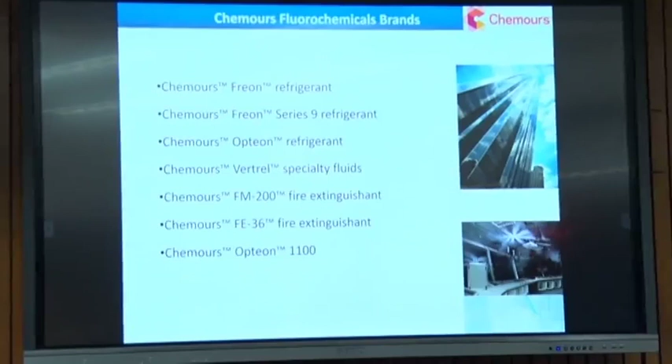What are the HFOs, the next generation refrigerants, the Opteon refrigerants? Then we also have fire extinguishing gases, which are also a part of the HFC and the HFO category, which help suppress fire. Then we have the Opteon 1100 refrigerant as well.

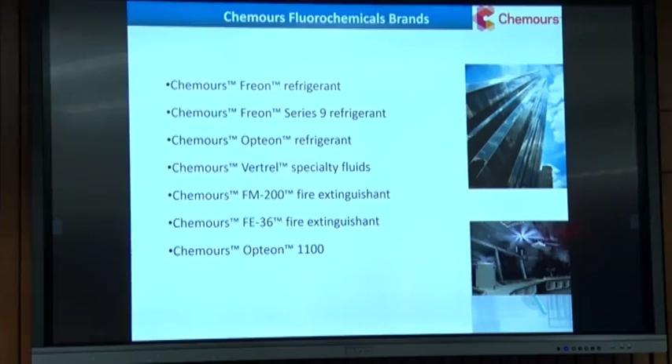So basically how it all started is CFCs. CFCs were the earlier molecules. HCFCs came in after CFCs, which had chlorine inside, which basically depleted the ozone layer. So in a refrigerant, the kind of properties we used to look for is that it has to be working around the ozone depletion, for which there is a parameter called the ODP.

Now most of the countries have signed the Montreal Protocol, as per which the ozone depleting potential has to be zero. We are already phasing out HCFCs, and we have already phased out a lot of them. Then the second property which we look for in a refrigerant is the global warming potential, the GWP. The next parameter is the total equivalent warming impact. And the third parameter is the life cycle climate performance of a refrigerant.

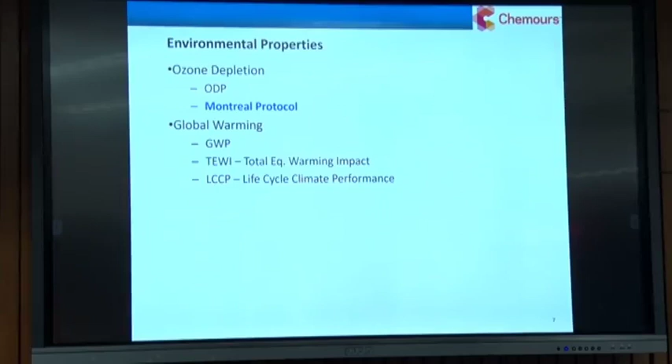If you see this slide, how the ozone is depleting is basically there is an O3 layer up in the stratosphere, and the UV radiation from the sun comes down, and the CFCs get released. They rise into the ozone layer, chlorine is released from the CFCs, and ozone reacts with bromine or chlorine to make a ClO molecule, and oxygen is made out of ozone. So that's a chain reaction which continues, and we keep on having depleted ozone and oxygen formation.

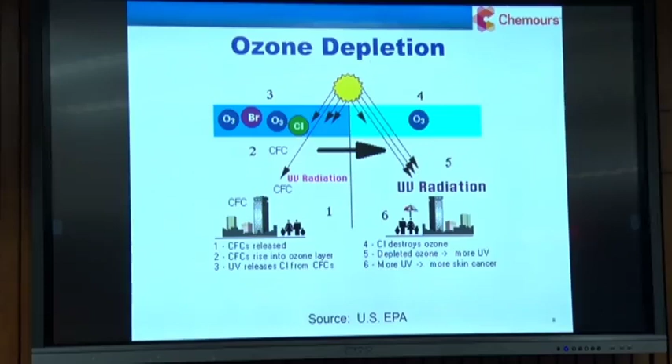So to take care of this, the Montreal Protocol came into existence. India became a party to the Montreal Protocol on 17 September 1992, and then it was amended later on. Multiple amendments happened, and on 15th October the latest one was signed. It basically caters to the CFC and HCFC phase out. For CFCs, we have already phased out the CFCs by 1st of August 2008 for the RAC sector.

For the HCFC phase out, the dates have already been marked. The base level for production and consumption is the average of 2009 and 2010. The freeze date is 2013, which is already done. We have already reduced 10% by 2015, and a 35% reduction will happen by 2020. 67.5% of the refrigerants which come under HCFCs will be reduced by 2025, and then there is a 100% cut by 2030, after which we have only 2.5% remaining, which is there for the servicing sector.

The Montreal Protocol also now takes care of the HFC phase down. A lot of people are talking about HFC phase down. For HFC phase down, the base level for production and consumption has already been declared. India has signed in the A5 Group 2, which means that the average of 2024 and 2026 will be the base level for production and consumption. The freeze will happen in 2028 for the base level.

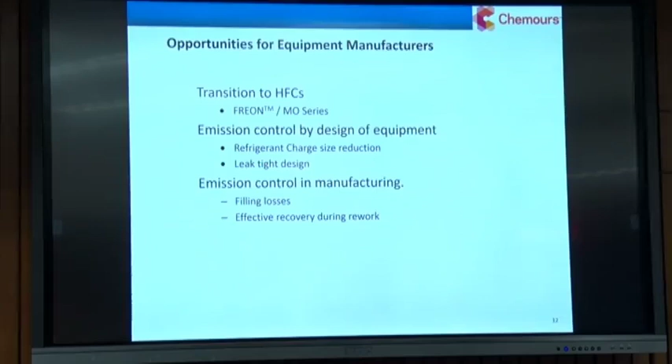Or they do the emission control by the design of the equipment, because there, for the existing equipment, they reduce the charge size, or they have a leak tight design, or there is an emission control during manufacturing, in which there is a control on the filling loss, and they do an effective recovery during the rework.

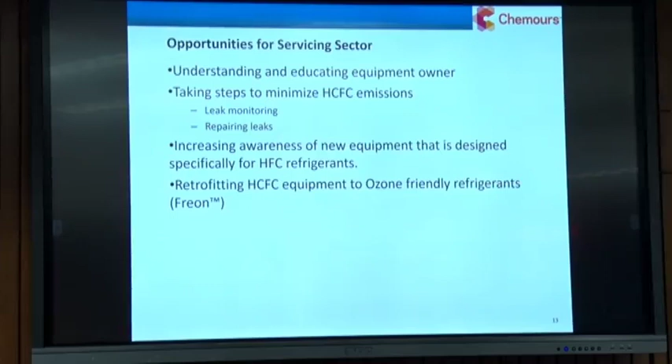For the service sector, basically customers need to understand and educate the equipment owners that HCFCs will be phased out. We need to work on newer alternatives which are already available. They need to take steps to minimize the existing HCFC emissions. Like if some building has an R22 chiller, they need to take care that steps are taken to minimize the emissions. They need to do the leak monitoring, and they need to take care of repairing of leaks.

There needs to be an increased awareness of new equipment that is designed. So, for any new purchase they are planning to do, or any new equipment they are planning to buy, there should be an increased awareness of what kind of alternates are available in HFCs or HFOs, and what they can have as an alternative to buy. Retrofitting HCFC equipment to ozone-friendly refrigerants is also an option.

For the building owners or the equipment owners where the chillers or the machines are already installed, new equipment purchase policy has to be stronger and stricter. HCFC phase-out strategy should be there in place for the companies. They have to assess the risk of having HCFCs, and how they should be moving to HFC options. They need to prioritize that.

They also need to determine the phase-out solution for existing HCFC machines they have, and how they can retrofit to alternate refrigerants which are available in the market. The last option, which is the most risky option, is that they can leave it as it is. Basically, they have to plan and budget for new equipment change or new refrigerant retrofit. They need to manage the emissions of HCFCs. They need to take care of leakage during the operation, and emission during the equipment maintenance has to be taken care of.

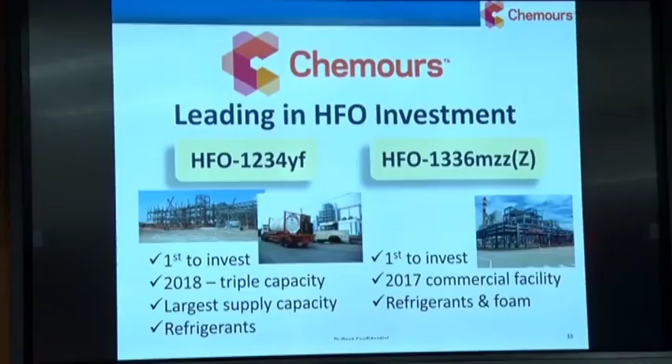We have done the leading olefin investment globally for two molecules which we have invented. One is 1234yf as a replacement for 134a, and the second molecule is 1336mzz(Z) for low pressure applications. Some blends of this are being used as a replacement for R123 in centrifugal chillers.

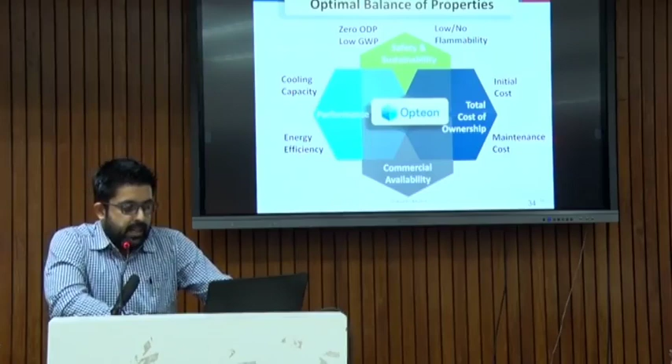So basically, for a refrigerant, what we look for is a balance of properties. It should have zero ODP, it should have a very low GWP, it should be non-flammable or mildly flammable as per the ASHRAE standards. It should have a minimal or low initial cost. It should have a low maintenance cost. Commercially, it should be available, and the energy efficiency and cooling capacity should be high. So the options are available.

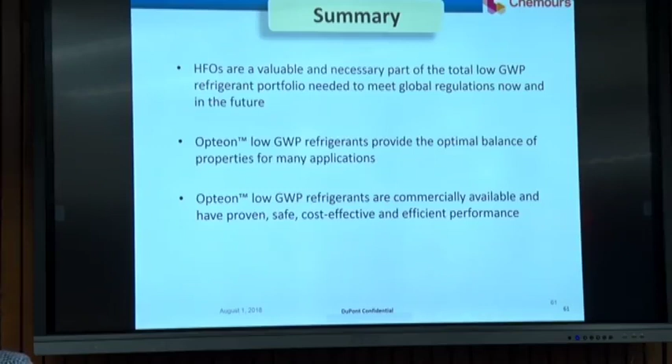HFOs are a valuable and necessary part of the total low GWP refrigerant portfolio. We have them. Almost 60 plus molecules are already there and being commercialized. They are very low and low GWP refrigerants which give the optimal balance of properties for many applications, and they are commercially available and have a proven safe and cost-effective track record.